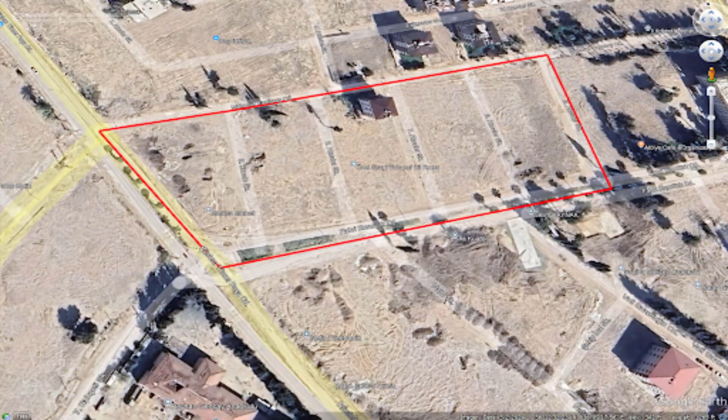We've arrived at our projected carbon emissions after analyzing data and following the instructions provided to us for use on Google Earth. From our calculations, we've determined that approximately 900,558 tons of CO2 emissions were produced across a 6,393 square meter area of construction. This translates to roughly 140.87 tons of CO2 per square meter.

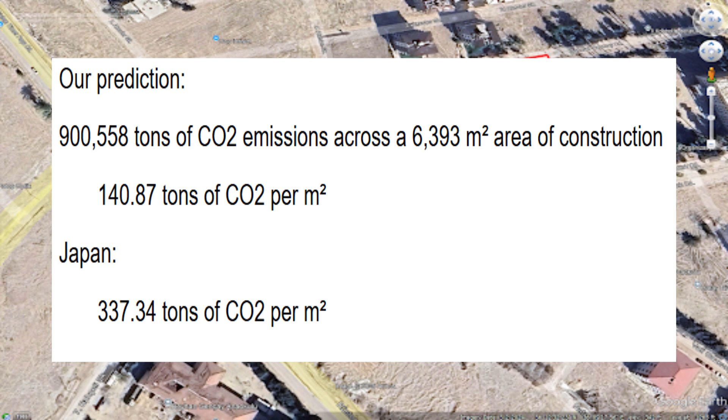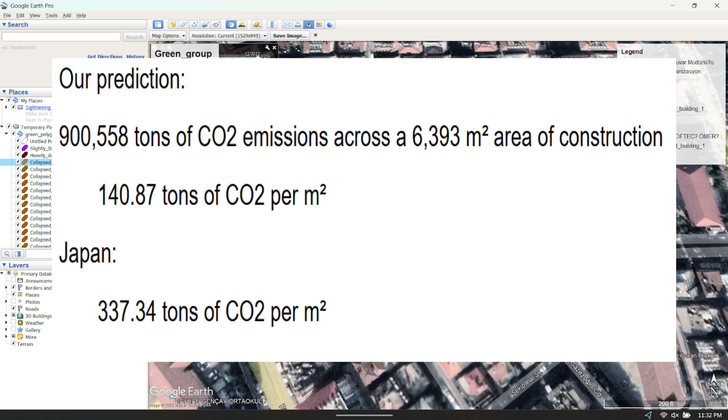For rebuilding just a small section of a city, to put this into perspective, the emissions in Hatay are significantly lower than those generated during the rebuild following the Great East Japan earthquake and tsunami, where emissions reached about 337.34 tons of CO2 per square meter, while we are producing less than half the emissions in comparison.

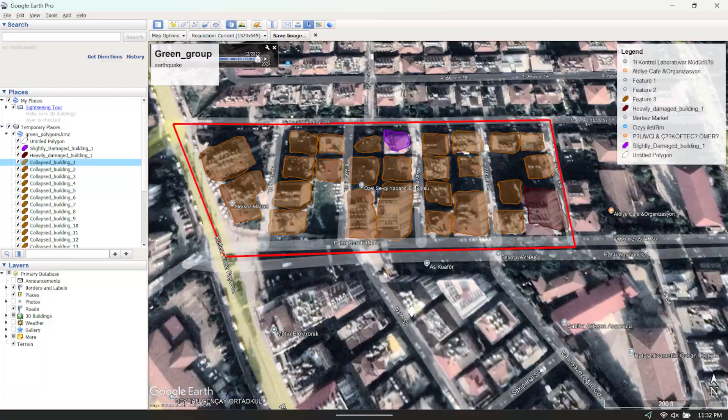The amount of carbon generated in the rebuilding process of Hatay remains unacceptable. We firmly believe that these emissions could have been considerably reduced through the use of advanced cement production techniques, sustainable architecture, and more efficient building practices. We've come up with several recommendations to make the rebuild process quicker, more sustainable, and less carbon intensive.

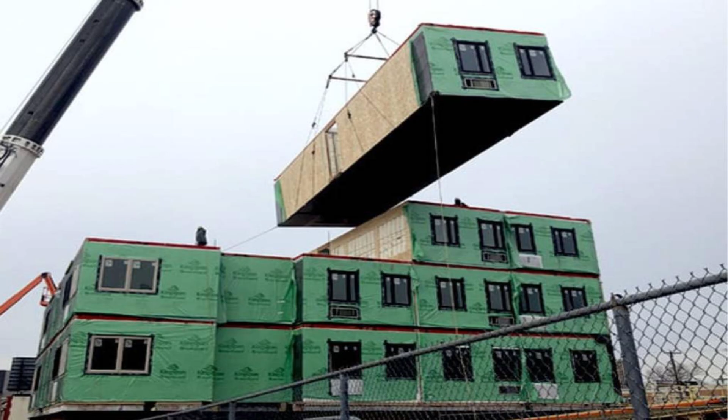One major idea we had is to use a modular design system. This system would allow us to construct buildings faster while keeping sustainability at the forefront of the rebuilding effort. By using materials designed with sustainability in mind and environmentally friendly practices, we can significantly lower emissions during construction.

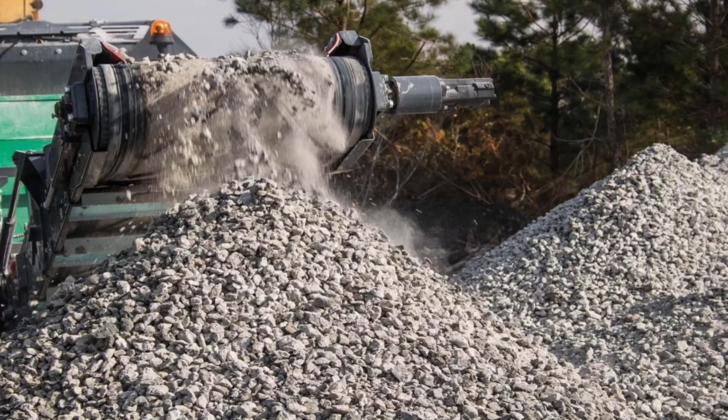After researching various technologies for producing cleaner cement, steel, and concrete, we focused on recycling, Cemex's Vertua low carbon cement, Wagners' Earth Friendly Concrete, and CarbonCure CO2 injection technology. Recycling is one of the most straightforward and impactful methods for reducing emissions. By using recycled materials, we eliminate the need for new mining, which reduces the carbon footprint associated with material extraction.

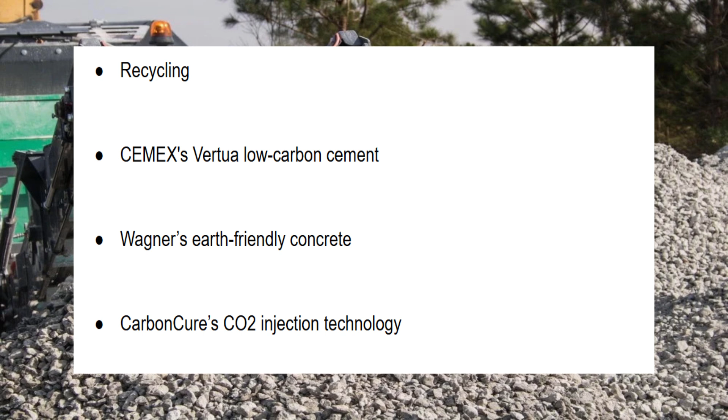The use of low-carbon cement and earth-friendly concrete is another important step. These materials incorporate byproducts like fly ash and slag, reducing CO2 emissions compared to traditional cement manufacturing methods. Not only are these materials more environmentally friendly, but they also retain the strength and durability needed for construction.

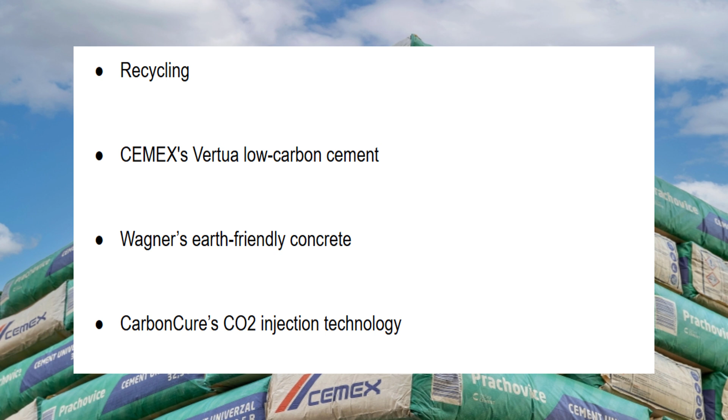CarbonCure CO2 injection technology further reduces the carbon impact by capturing and reintroducing the CO2 produced during the material creation process into the concrete itself. This strengthens the concrete by forming calcium carbonate, which improves its resilience to future earthquakes.

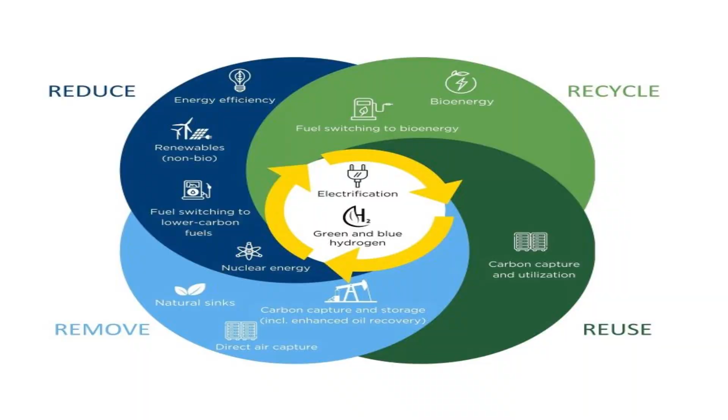The combination of these technologies promotes a circular economy where waste from one process can be turned into a valuable resource for another. By using these sustainable materials and technologies, we can reduce emissions while ensuring the rebuild is both efficient and resilient. Another key aspect of our plan is modular design and architecture.

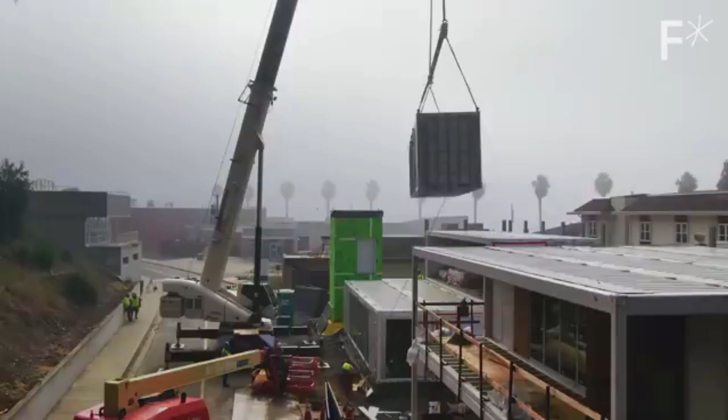Modular construction involves prefabricating building sections in a factory environment before assembling them at the construction site. There are several advantages to this approach that make it particularly well suited for the Haiti rebuild. The first of which is that modular design accelerates the building process. Since site preparation and module production get to happen concurrently, buildings are able to go up much faster.

This reduces disruptions caused by weather and eliminates delays that we often attribute to traditional construction. The result is an overall shorter construction timeline. Secondly, this is much more cost effective. The reduction in labor costs, less waste, and shorter project timelines all contribute to significant savings.

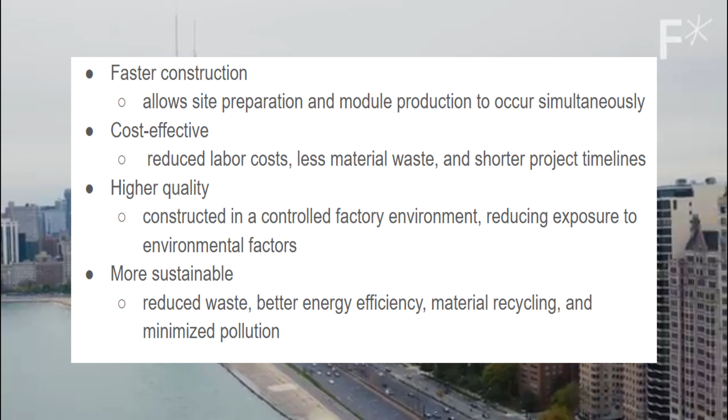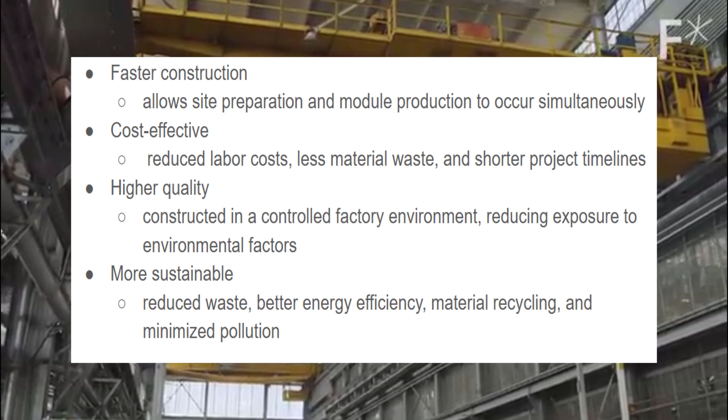Since the modules are built in a controlled factory setting, materials can be used much more efficiently, and this reduces the waste and the associated costs of generating that waste. Additionally, labor costs are reduced because workers can focus on the assembly rather than the extensive on-site construction.

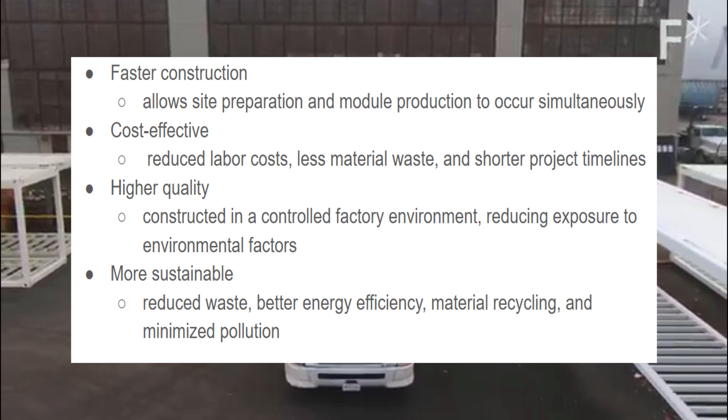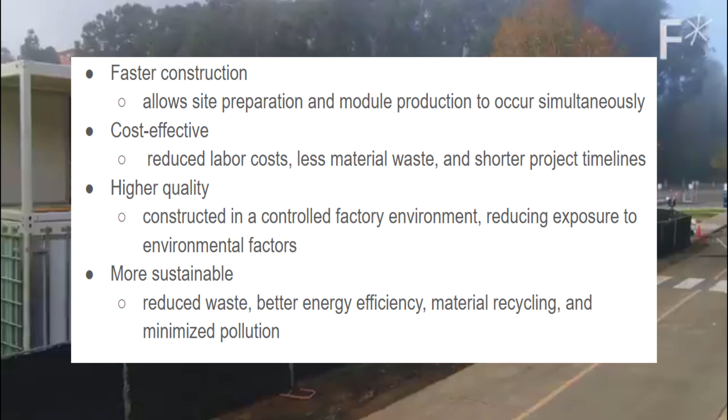The third advantage is that modular buildings are often of higher quality. Since the modules are produced in a factory environment which has controlled conditions, they are built with better precision and durability. Traditional construction is susceptible to environmental factors like rain, snow, or varying temperature. This can affect the quality of the final product. In contrast, modular construction minimizes these risks, and it ensures better performance in the long run.

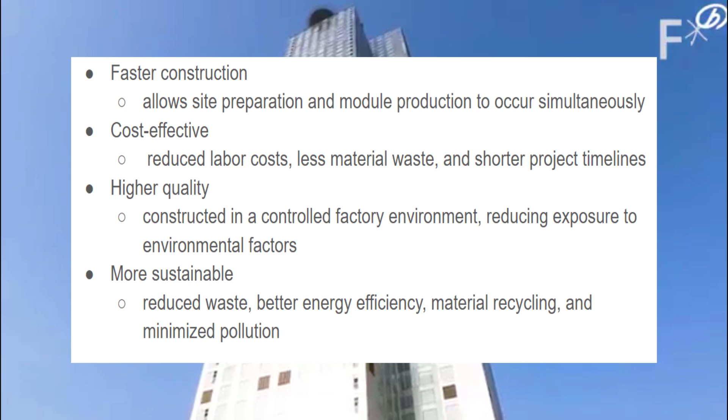The final advantage is that modular construction is generally more sustainable. The aforementioned reduction in waste combined with the potential for better energy efficiencies are key advantages. Since modules are manufactured in factories, leftover materials can be recycled and reused. This reduces the overall environmental impact of construction. The shorter construction period also minimizes the pollution generated in the surrounding areas. This makes modular design an environmentally responsible choice.

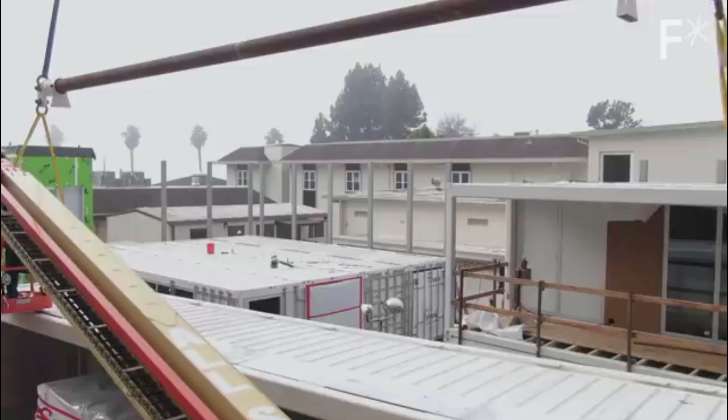By integrating modular design with the use of sustainable materials, we can rebuild Haiti in a way that is faster, more cost-effective, and environmentally responsible. This approach is not only good at reducing the emissions, but also creates stronger, more resilient buildings that can withstand future disasters, thus ensuring a better future for Haiti's residents.